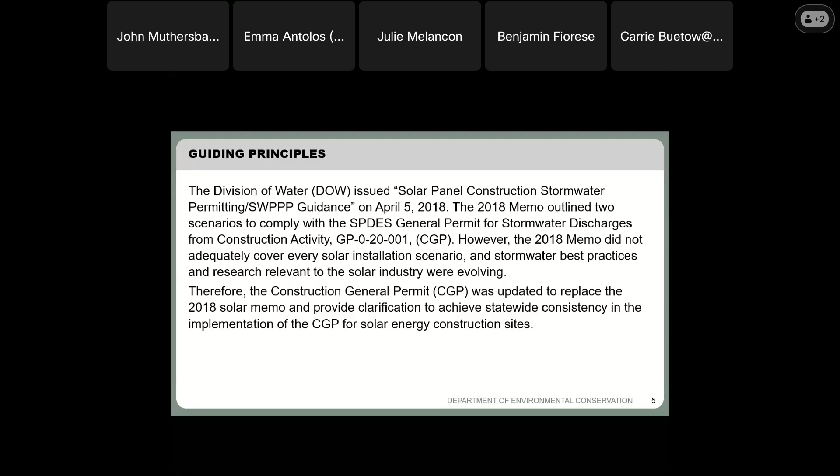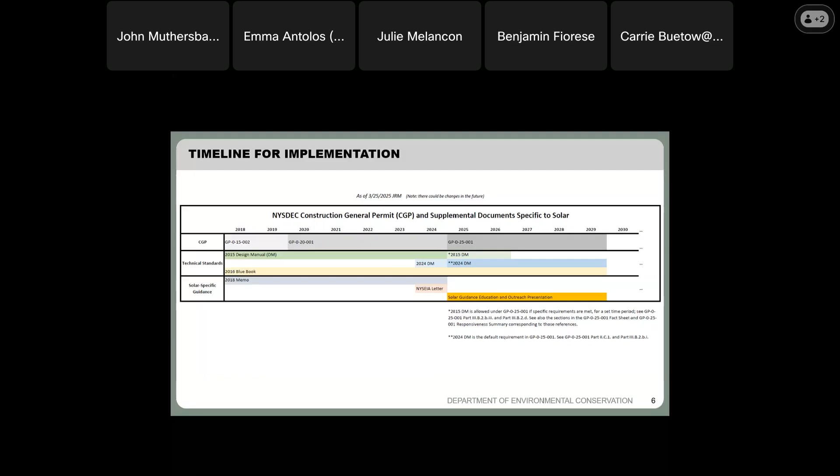This graphic talks a little bit about the design manual for our technical standards as well as our solar specific guidance. As you can see, the 2018 memo has officially gone away. There was a supplement called the NYSEIA letter, which was basically back and forth between New York Solar Energy Industries Association staff and DEC colleagues, and that has gone away as well. We're now relying on the solar guidance in the new construction general permit and this presentation. So if you have that 2018 memo, you can toss it out and refer to the permit going forward.

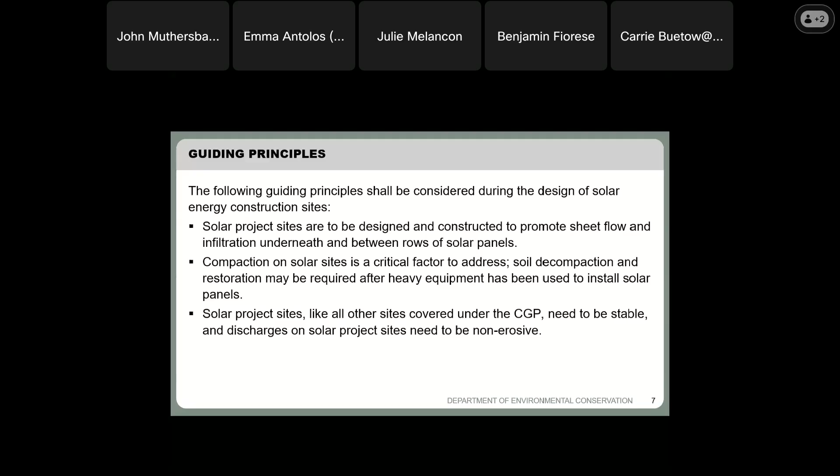We want to keep a couple of things in mind when designing solar facilities. We want them designed and constructed to promote sheet flow and infiltration underneath and in between the rows of solar panels. We want to address compaction on solar sites, and soil decompaction restoration may be required since there's a lot of heavy equipment moving across these sites, in between the rows and up and down the roadways. Solar project sites, like all other sites covered in the construction general permit, need to be stable, and discharges need to be non-erosive. That doesn't change for solar sites.

When we're looking at Appendix B tables 1 and 2, we're isolating solar array field areas versus other areas on site. The scenarios in this training only apply to the solar array field area of the project, meaning the rows of panels, the inner row spaces, and the surrounding buffer areas. It does not include traditional impervious areas like buildings, substation pads, and roadways.

If you have traditional impervious areas on site, the SWPPP has to address post-construction stormwater management controls for those areas of the project. If you're looking for relief from designing post-construction practices for these areas, there are some approved alternatives, such as limited use pervious access roads and alternative stormwater management practices for substations, and they can achieve sizing criteria and reduce post-construction practices. But in general, traditionally impervious areas need to have their post-construction stormwater managed.

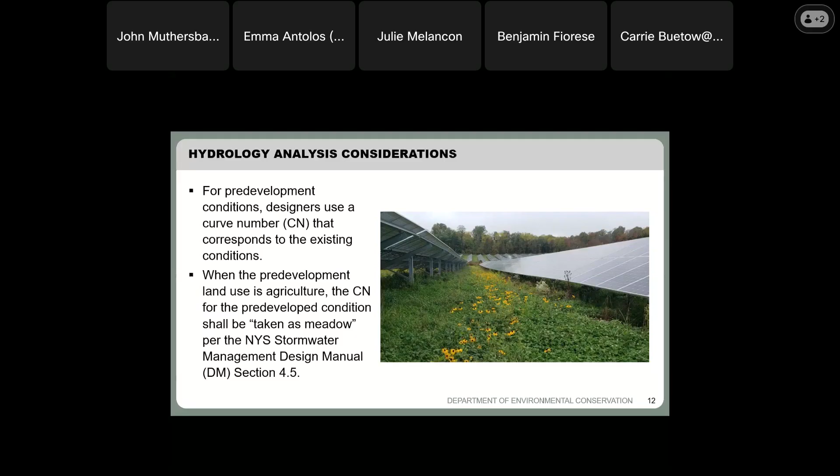For post-construction conditions, I'm going to talk a lot about Appendix B tables 1 and 2. The takeaway from Appendix B is that it's the section that tells you what type of controls you need for your project. Appendix B Table 1 covers projects that only need a SWPPP that addresses erosion and sediment controls. Table 2 includes projects that need post-construction stormwater management.

For projects that meet Appendix B Table 1 conditions, the solar panels are considered disconnected impervious area, and the curve number for meadow can be used for that solar array field area. In the case of agrivoltaics, pasture or row crops may be used to more accurately reflect the post-construction land use, and we're going to talk about that a little bit more later.

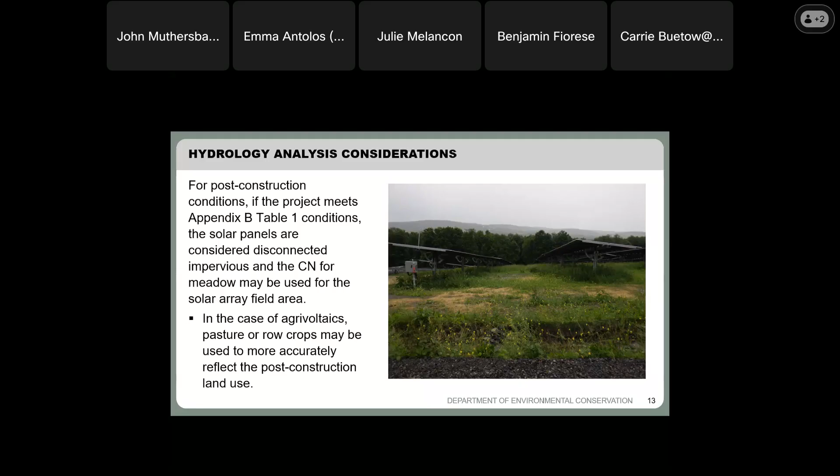If the project meets Appendix B Table 2 conditions, the solar panels are considered connected impervious area, and the SWPPP has to include post-construction stormwater practices for those areas. If you want, a downstream analysis can be conducted to determine if post-construction quantity controls for the 10 and 100-year events are needed, and that information is in the design manual, section 4.10.

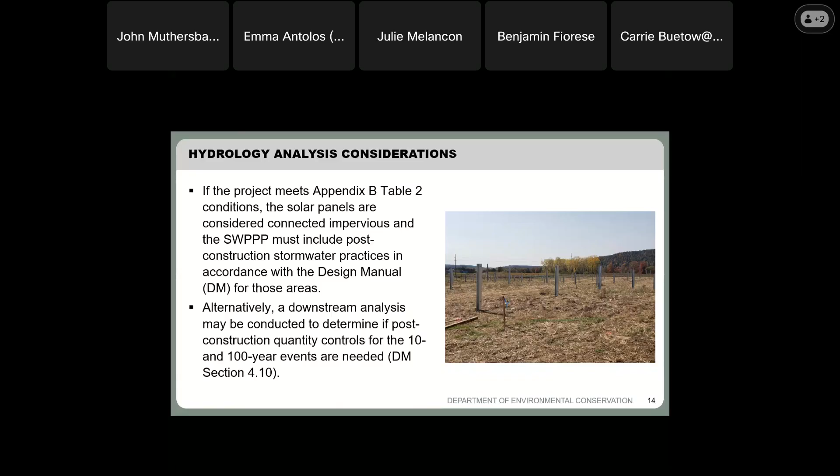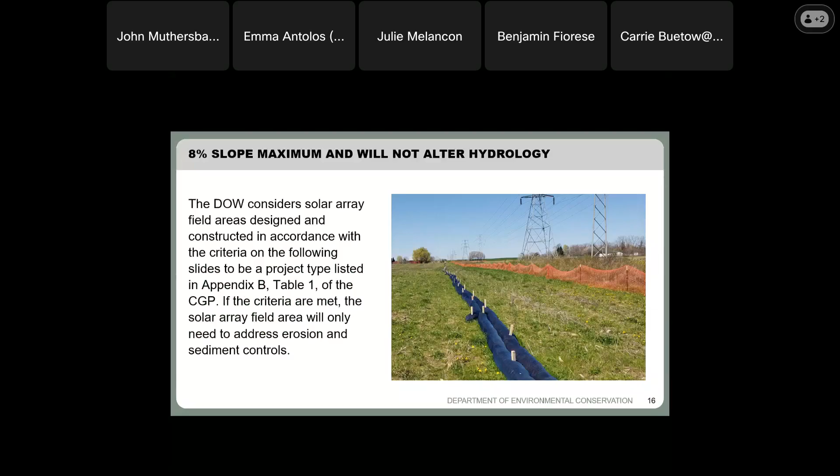So now we're going to focus on those projects that only need erosion and sediment controls. So 8% slope maximum and will not alter the hydrology. That's one of the criteria. So if the solar array field areas are designed and constructed in accordance with these criteria, then they only need to use erosion and sediment controls, like I stated. So the 8% slope maximum and is not going to alter the hydrology.

Panels have to be elevated off the ground. And when we talk about this, some people say, well, what does it mean to be elevated off the ground surface? And what the target is, is your well-established vegetative cover under the panels.

So if the panels aren't sufficiently elevated off the ground to allow a post-construction ground surface consisting of a well-established vegetative cover, and when we talk about that, we're talking about the final stabilization definition in Appendix A of the Construction General Permit, then it has to be considered connected impervious area for the hydrology analysis, and the SWPPP has to address post-construction stormwater management controls designed in accordance with the sizing criteria in Chapter 4 or Chapter 10 for the East of Hudson watershed.

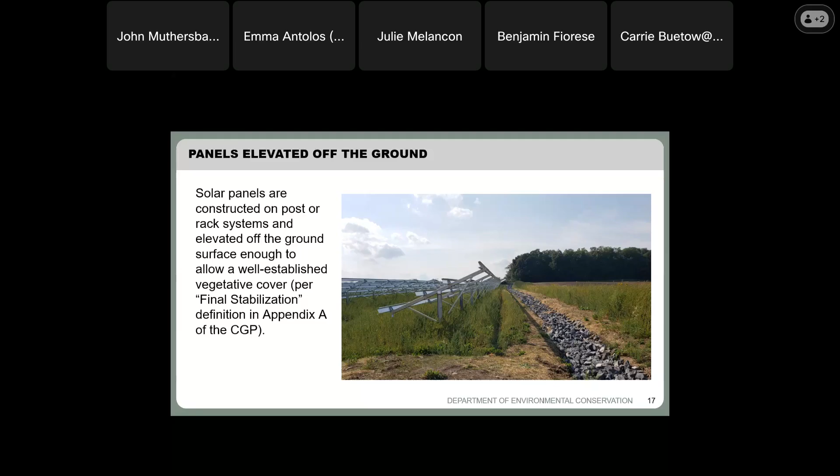So really, your height is dependent. If it's high enough, it depends on what vegetation is coming in below it. If you have agrivoltaics, you're probably going to need to have higher posts for your panels. And then if you're just having grass, just make sure it's elevated enough to get your grass growing.

Panels have to be spaced one table width apart. So that way stormwater can flow off the down gradient side of the panels and continue as sheet flow across the ground surface. And this is based in the design manual sections 5.3.2 and 5.3.4. We also have a diagram that we'll show in a little bit about the inter-row space requirements.

So panel spacing is really consistent with the concept of disconnection of impervious areas, and it's really an important component to consider when avoiding erosive conditions. So disconnection can be achieved through adequate spacing of the rows over areas of well-established vegetative cover. If your inter-row space requirements are insufficient, the infiltration is less likely, resulting in panels that are more likely to create concentrated flow paths and perform as impervious.

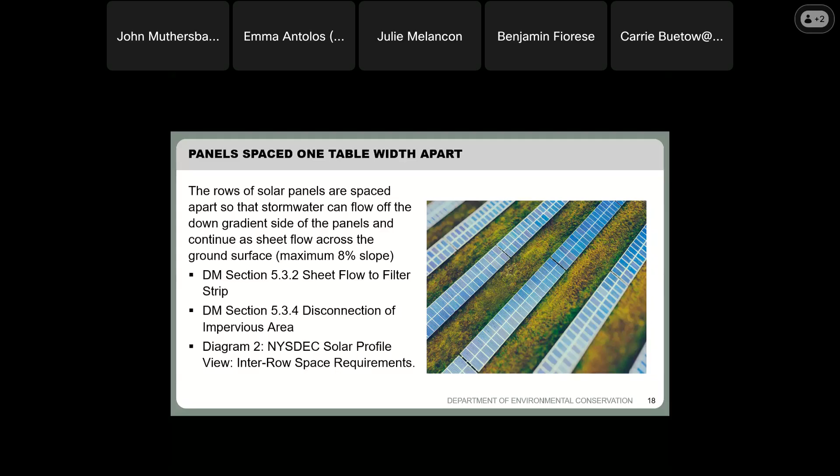So for solar array field areas that have insufficient spacing for infiltration, the disconnection credit for runoff reduction would not be applicable. And as a result, the SWPPP would need to address post-construction stormwater management control practices. So for the designer to meet the intent of disconnection, the design should consider the largest solar panel width, considering all rotations and positions, and provide that width as the minimum spacing down gradient of every row of solar panels in the solar array field area.

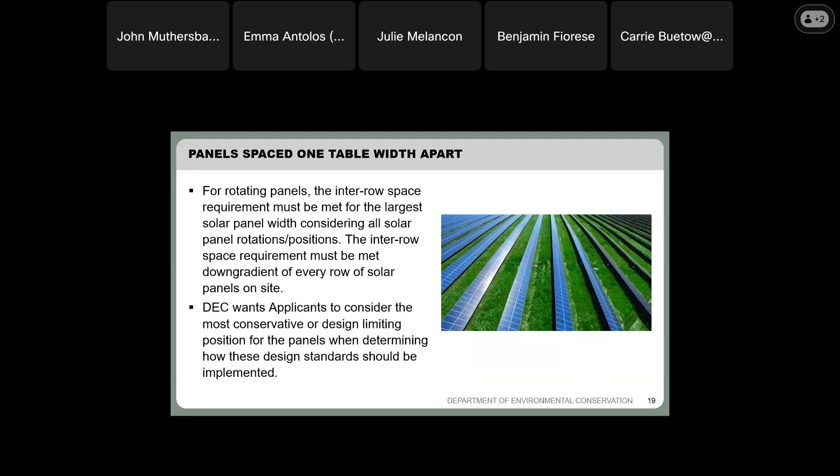And we want applicants to consider the most conservative or design limiting position for the panels when determining how your standards are going to be implemented. If you have rotating panels, I'm actually going to show you this next slide. So if you're using rotating panels, solar trackers aren't considered disconnected impervious area unless they meet the criteria.

The SWPPP has to demonstrate that the site conditions and placement of solar panels will allow for disconnection and achieve runoff reduction objectives of the Construction General Permit in order to apply the area reduction credit for the panels in all positions. So you can see the solar table width here; if this is a fixed panel, that's the maximum width. But if it was a rotating panel, if it went more parallel to the surface, it would have a wider width.

So we also want to make sure we're not altering the hydrology from pre to post development conditions. So what we refer to as the definition of altering the hydrology is from Appendix A of the Construction General Permit. And it basically says the post-development peak flow rates have increased by more than 5% of the pre-developed condition for the design storm of interest. So the designers really need to perform the assessment and the hydrology analysis to make this determination.

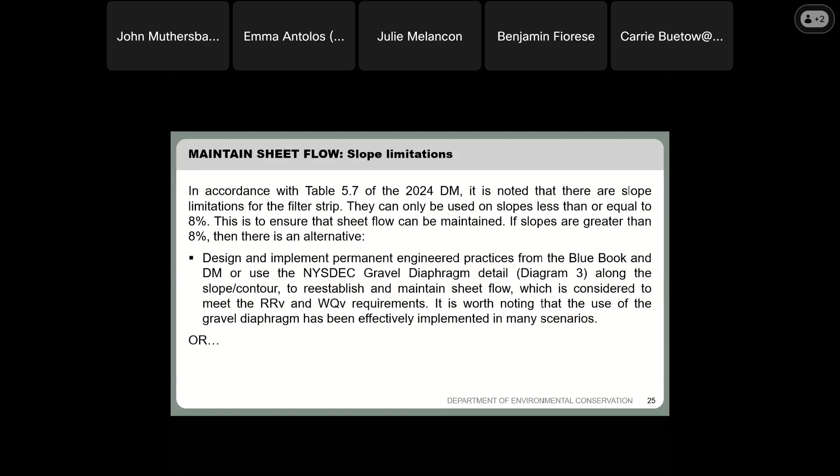So just keep in mind that the key is sheet flow. Or where sheet flow can't be maintained, consider the panels in that area to be connected impervious area and design post-construction stormwater management control practices to provide the water quality and quantity controls for that portion of the solar array field area.

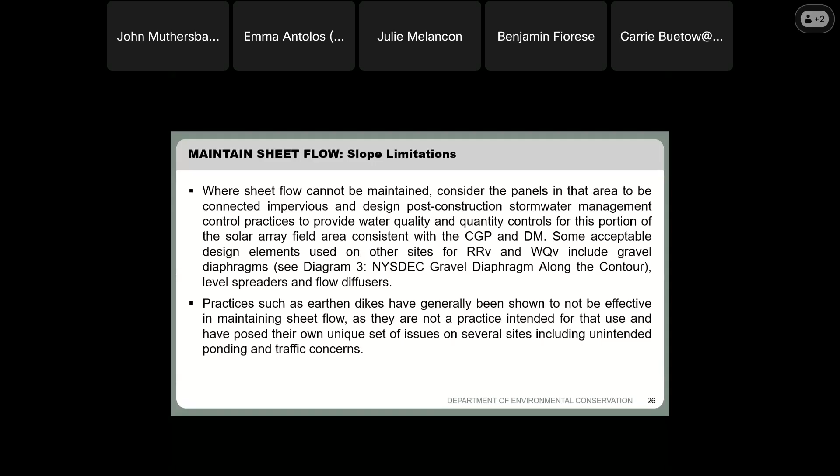Some other design elements used on other sites for runoff reduction volume and water quality volume include gravel diaphragms, level spreaders, and flow diffusers. We have had facilities come to us with designs for earthen dikes. We've seen some in practice, and they've generally been shown not to be effective in maintaining sheet flow, as they're not really a practice intended for that use, and they have their own set of issues, including unintended ponding and traffic concerns when construction vehicles are going back and forth. They can weaken those earthen dikes and cause places for concentrated flow to overtop them.

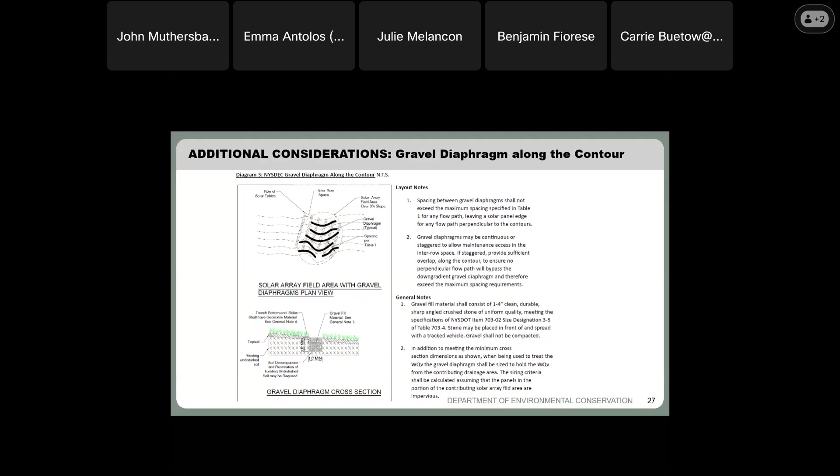So here is our gravel diaphragm diagram. And there are some notes that go along with it. Basically, they want to be placed on the contour to reestablish that sheet flow. They have a specific spacing used to make sure that there's not too much of a run between diaphragms, so that there's not real erosion starting up in between the two.

One of the things that we've noticed is if these aren't protected during construction, they can get plugged up with silt before things even get started. So to prevent excess silt and debris during construction, it's recommended to leave the excess fabric to fold over the diaphragm from the up-gradient side. And then you can remove that once everything is stabilized.

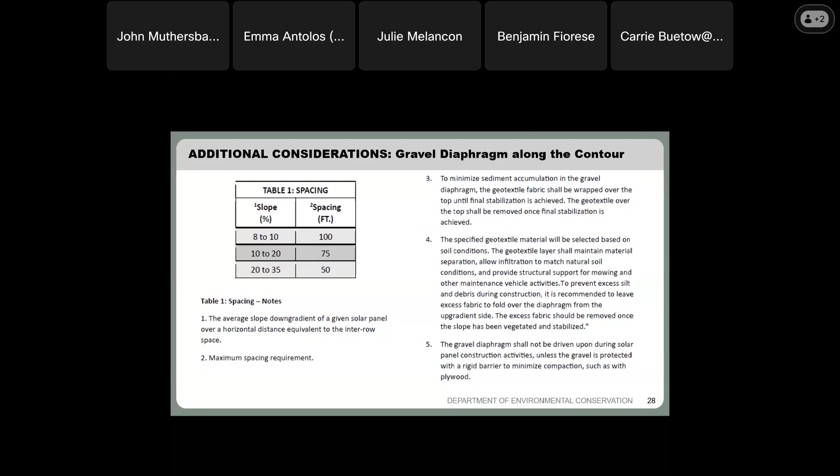So what are the takeaways here? We want to make sure that you design these so that they're stable. When the project can achieve panels elevated off the ground surface, rows of panels have adequate spacing, sheet flow is maintained, and there's no change in hydrology, no other practices are required to address the water quality volume and runoff reduction requirements for the solar array field area. You can just do erosion and sediment controls and quantity controls if needed.

So Appendix B, Table 2: when do you need a full SWPPP? Well, if you have slopes greater than 8% and you can't maintain sheet flow, if you have slopes less than 8% but you're going to alter the hydrology, or if you have panels spaced closer than one table width apart, or you have ground-mounted tables that don't allow for the establishment of the 80% vegetative cover, and all traditional impervious areas included with the solar development.

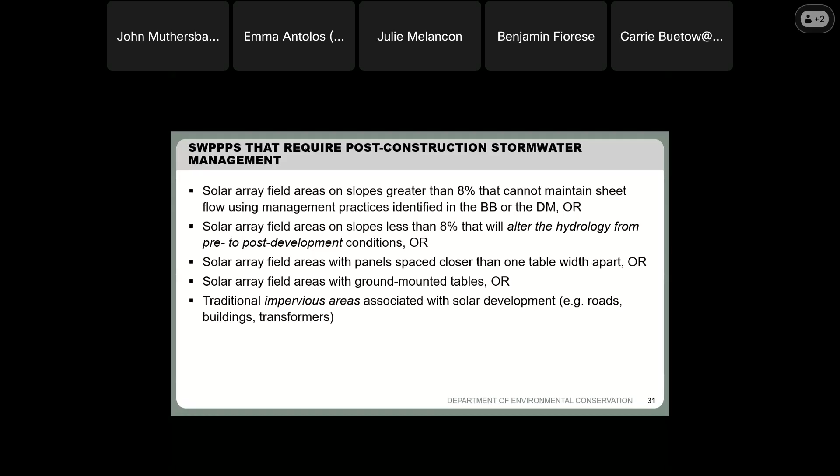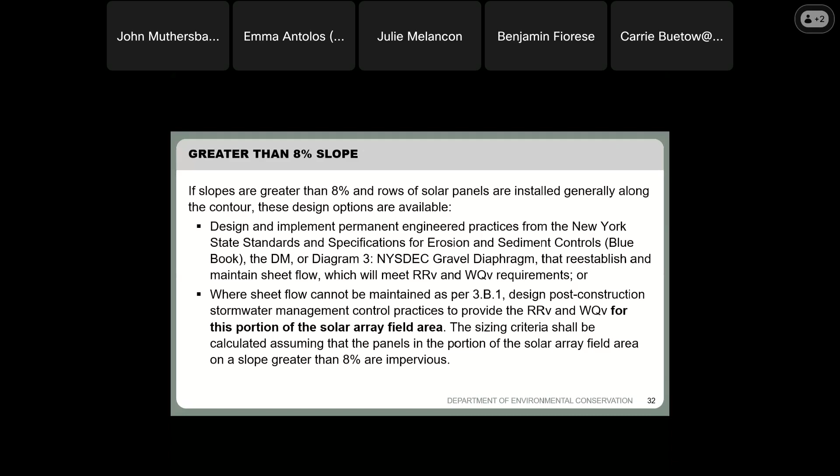So if your slopes are greater than 8%, you're generally along the contour. You can, like we said before, design and implement permanent practices from the Blue Book, the design manual, or use the gravel diaphragm that are going to maintain sheet flow and meet the runoff reduction volume and water quality volume requirements. Or if you can't maintain sheet flow, then you need to design post-construction practices that provide the runoff reduction volume and water quality volume for that portion of the solar array field area. And the modeling is with those areas as connected impervious.

If you have slope greater than 8%, again, reiterating that you can reestablish and maintain sheet flow, or if you can't, you're going to design post-construction stormwater management control practices to provide water quality and quantity treatment for that portion of the solar array field area, assuming the panels are connected impervious. Just a note here, if you use the gravel diaphragm along the contour to meet the water quality volume and runoff reduction volume requirements, the requirements for channel protection volume, Qp and Qf, must be met with a different practice.

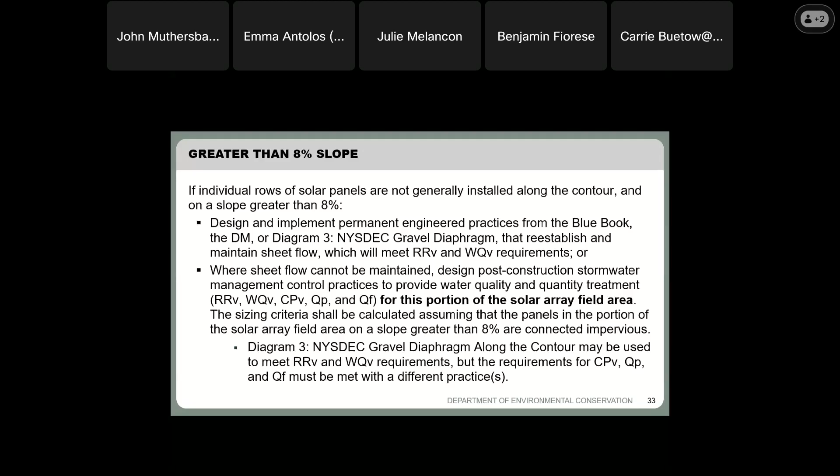So unlike conventional construction projects, where you have your elevated panels, your rows are spaced well and sheet flow is maintained, the area under the panels will function as vegetated open space. No other practices would be required to address water quality volume and runoff reduction volume requirements for that solar array field area. So you can have a full SWPPP that does not require water quality volume and runoff reduction volume for solar array field areas that meet that criteria. Quantity controls from chapter 4 of the design manual must also be addressed unless one of the waiver criteria from chapter 4 can be applied.

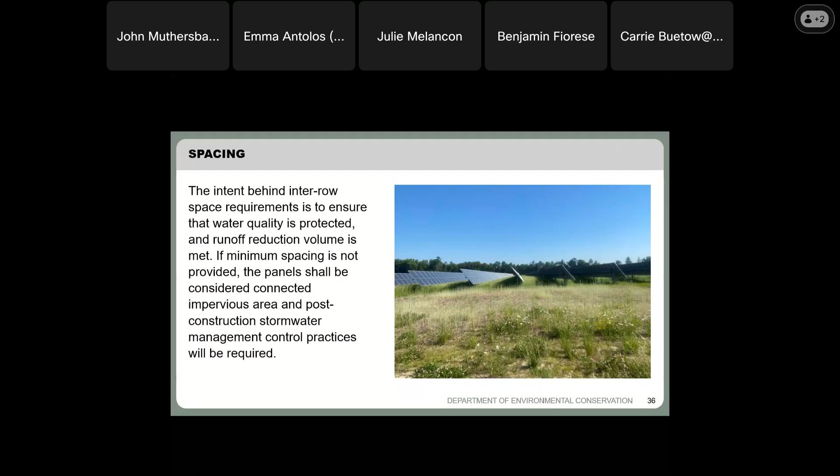So spacing: the intent behind the inter-row space is to ensure that water quality is protected and runoff reduction volume is met. If you don't have that minimum spacing, the panels do have to be considered connected impervious area, and post-construction stormwater management control practices are going to be required. So as a summary, here's where you need a basic SWPPP, here's where you need a full SWPPP. Just keep these in mind. This is a great summary to keep in your back pocket.

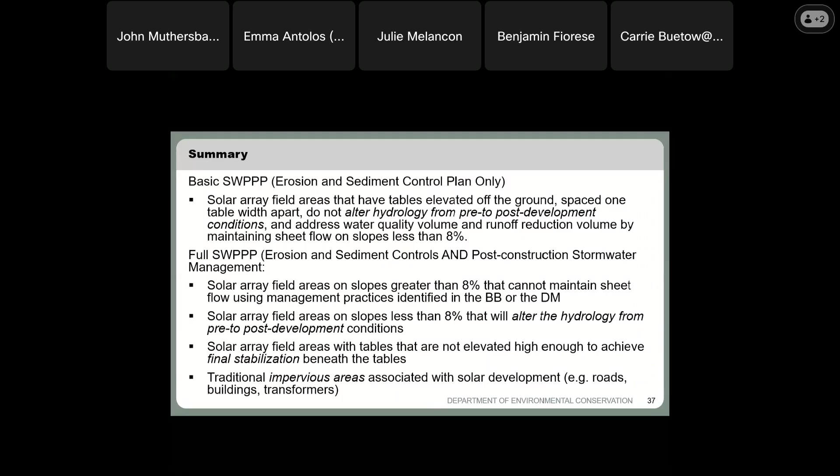Now, we've talked a little bit about some optional tools for solar sites. We want to get into that a little more. I did notice there was a question in the chat about limited use pervious access roads. I didn't see exactly what the question said, but maybe this would answer some of the questions. It's very important that you recognize that limited use pervious access roads are not required for solar sites. There's no mandate that says you have to use this. And in fact, the limited use pervious access road is not really suitable for all sites. It can only be used if the following criteria have been met.

So they can't be utilized during construction. They can't be temporarily covered with fabric and stone or any other materials during construction. They can't be used as a runoff reduction volume practice for the other impervious areas on the site. For the hydrology analysis, the road has to match pre-development conditions. And the design and construction needs to comply with all of the notes in the details. Okay. Let me just go through these notes. So here's some other examples of limitations.

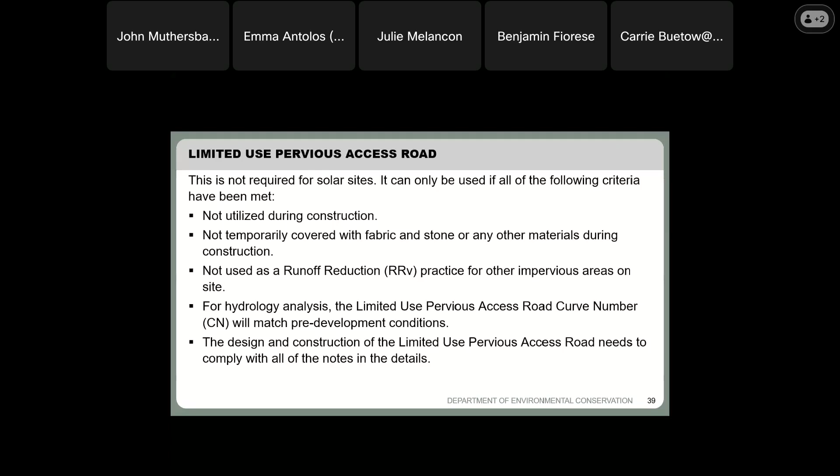There are slope limitations. Cross slopes can't exceed 6%, and the longitudinal slope shouldn't exceed 15%. And if you use them during construction, it may impact soil or other conditions that require testing and reconstruction to be effective as a pervious feature. And many sites don't have enough available area to construct both temporary and permanent roads in separate footprints. And it can't be constructed or used until all areas subject to runoff onto the road have achieved final stabilization. And one more thing to note is these are not permeable pavers or permeable asphalt, and they shouldn't be treated or modeled that way.

We also have an alternative substation design that was developed by EDR. Those systems provide treatment and management of the water quality volume, runoff reduction volume, and channel protection volume, Qp and Qf, by providing storage and infiltration of all rain events up to and including the 100-year storm. It has to comply with chapters 5 and 6 of the design manual not to be considered a deviation. So what that means is you still have to consider things like separation to bedrock and groundwater, and the minimum width of a riparian buffer or filter strip is 50 feet.

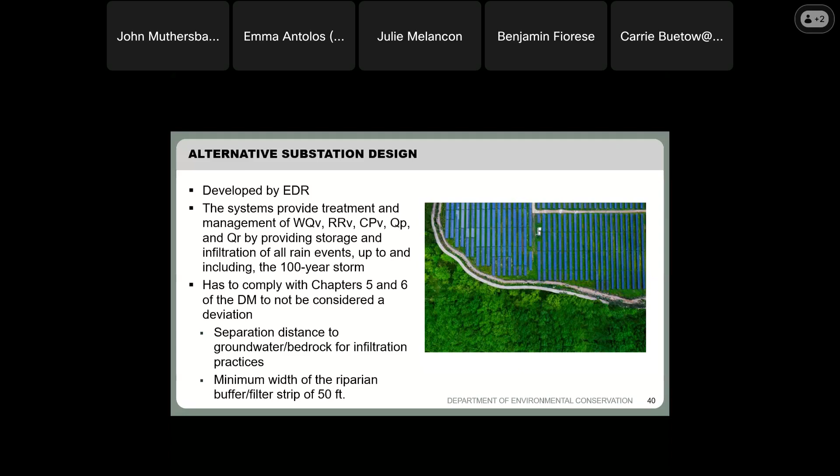And one thing of note, I just wanted to say before I forget, that DEC is working on a catalog of alternative practices that we're going to be putting together and making available on our website.

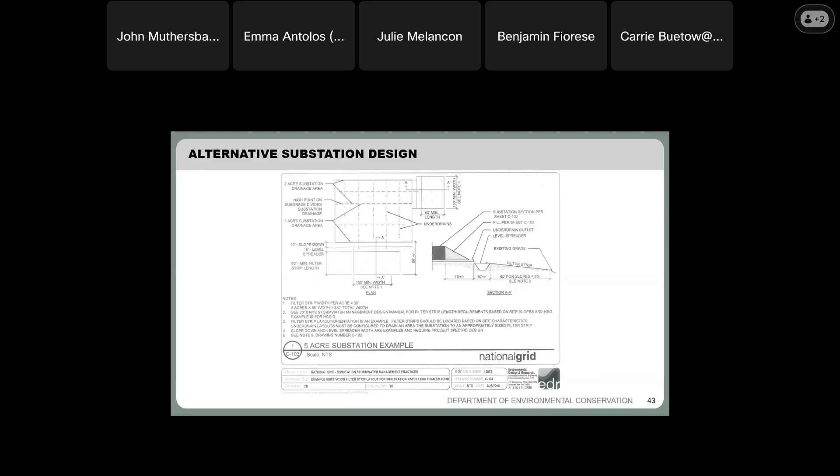And there's flexibility in modeling these in TR-55. If they're mostly vegetated, they can be considered a pervious surface. If they're more like a farm road, they can be modeled as a dirt road. You just use your best professional judgment when you're doing your calculations.

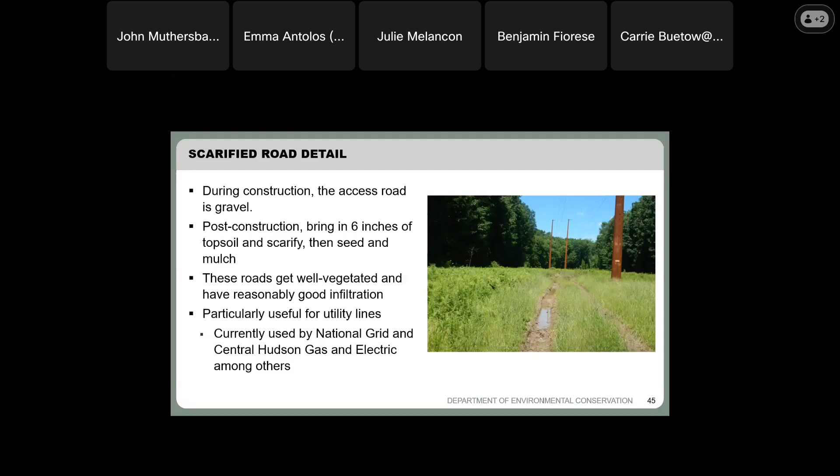So during construction, the access road consists of gravel. Post-construction, they bring in 6 inches of topsoil and scarify and seed and mulch. And these roads get really well vegetated. They have reasonably good infiltration. Like I said before, they're really useful for utility lines. National Grid and CHGE are using them currently. And then we have the detail that we're going to add to the catalog of practices.

So the flow diffusers provide additional attenuation to reduce runoff rates. You can stagger them beneath the panels to catch the water leaving the panels and slow it down while avoiding most of the drive aisles for construction. When they're used to treat the water quality volume for the panels, the designer sizes the storage volume of the flow diffuser sump to hold the calculated incremental water quality volume of the contributing panel sub area flowing into each diffuser.

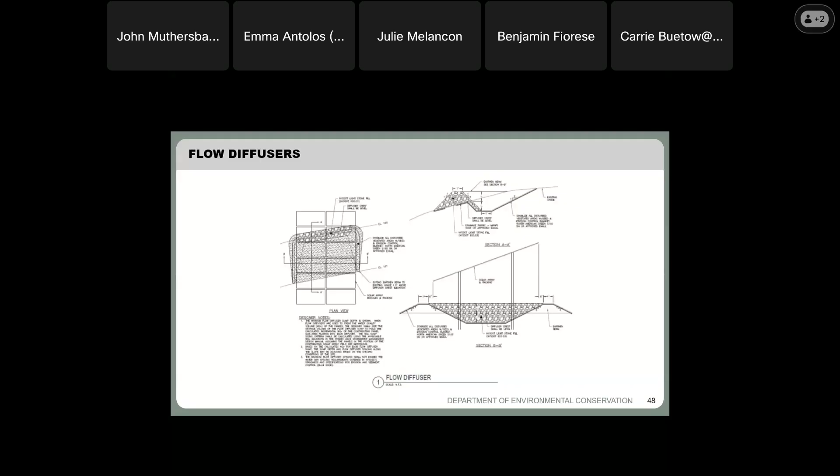When you're looking at the sump, you can calculate that using the applicable water quality volume equations in the design manual. You just have to assume the panels in the portion of the contributing solar array field area are connected impervious for the purposes of sizing the sump. And then maximum flow diffuser spacing is the same as water bar spacing in the Blue Book. And here's the detail for that flow diffuser.

So when sizing these practices for the water quality volume, calculate the percent impervious by looking at the solar table width over the solar table width plus the inter-row space width.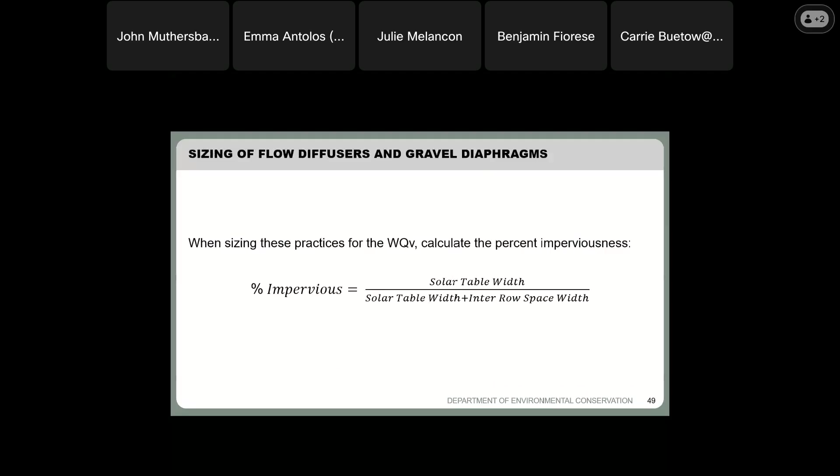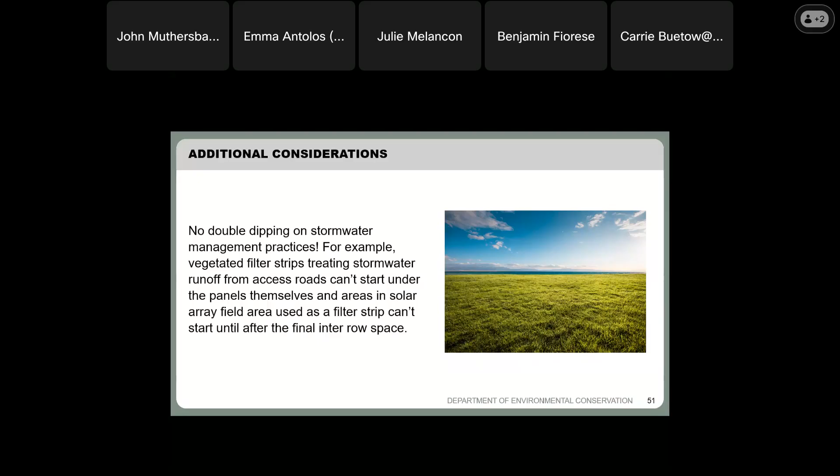Now we wanted to put in some additional considerations for these sites. A lot of these sites have other activities going on, especially if you're considering large scale renewables. So we want to make sure there's no double dipping on stormwater management practices. So for example, your vegetated filter strips treating stormwater runoff from access roads can't start under the panels themselves. And areas in the solar array field area used as a filter strip can't start until after the final inter-row space.

There are additional DEC resources that you can look to. For example, you can consult the Division of Water's Bureau of Flood Protection and Dam Safety's floodplain management guidelines for solar array and wind farm projects, if you're considering a solar project in a floodplain. Division of Materials Management also has their DMM-4, which is the photovoltaic solar projects at closed landfills program policy, if you're considering a landfill project.

Decompaction. So a lot of sites struggle with decompaction, when it can take place and the order of operations to make sure that you're not disturbing any electrical lines that have already been laid or things like that. So heavy use areas such as laydown yards and temporary access roads need to be decompacted to 12 inches, or 18 inches in agricultural areas.

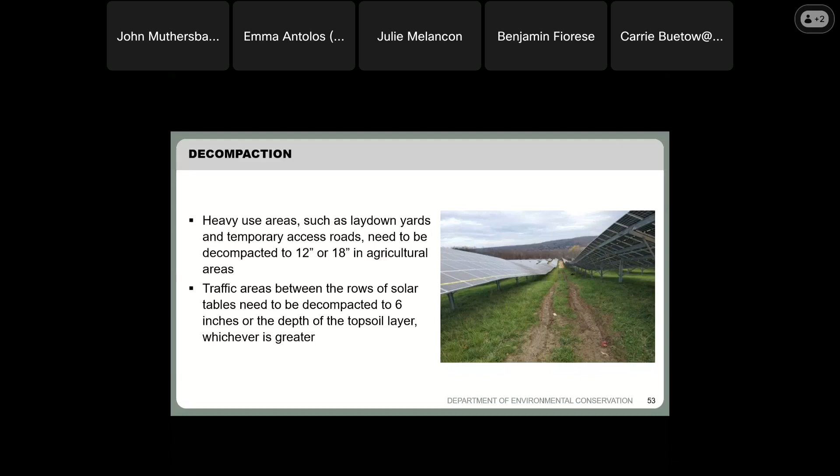Traffic areas between the rows of solar tables need to be decompacted to 6 inches or the depth of the topsoil layer, whichever is greater. At the end of the project, if you can't push a 3/8 inch metal bar 12 inches into the soil with just your body weight, you haven't done enough.

If your solar array field area falls under table 2, which means you need a full SWPPP and no decompaction is performed, then the designer needs to go up one hydrologic soil group for modeling and provide water quality volume treatment for those areas. So for example, if you are in A soils, it would be B soils. If you were in B soils, it would be C soils, and so on.

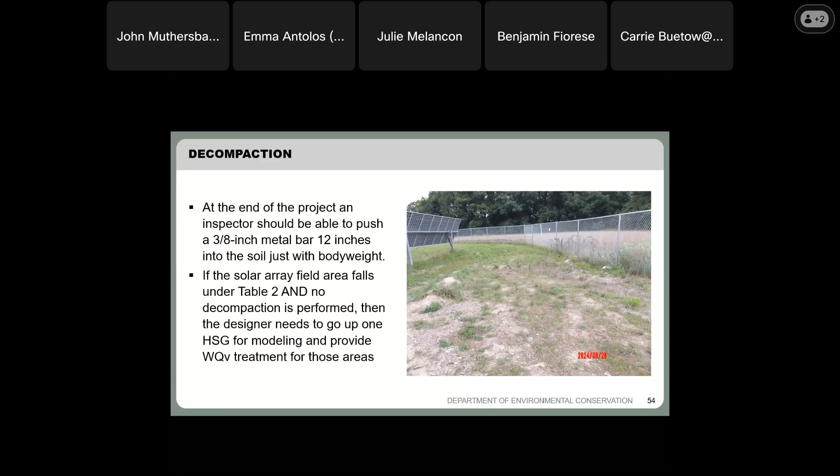We get a lot of questions about dewatering. The construction general permit only allows for discharges of clean water. If soil or groundwater contamination exists, or a polymer or other water treatment chemical is used, then you have to hold and haul or apply for an individual SPDES permit. And if you're going to apply for an individual SPDES permit, that's really going to have impacts on your project timeline. It takes about a year to get an individual SPDES permit.

So if you are working in areas of contaminated soil or groundwater, and you know you're going to do a large volume of dewatering, you really need to consider your options - if you're going to have frac tank upon frac tank of water hauled away, or if you're going to treat it on site.

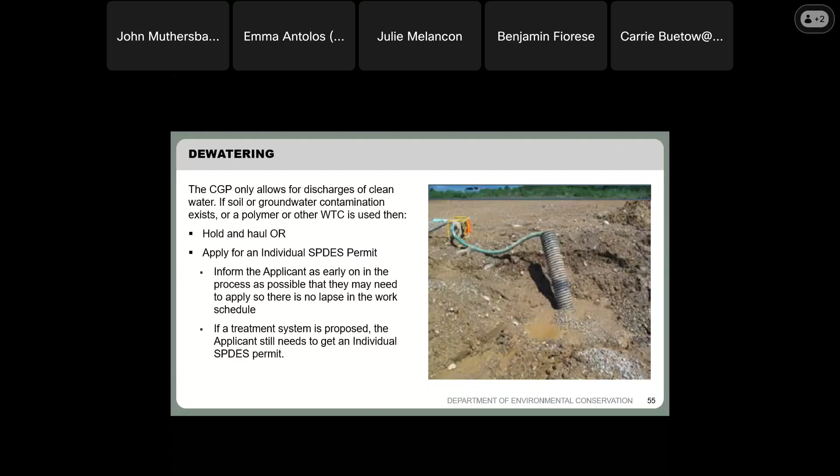Oh, and this is important too. If a treatment system is proposed - say you have like a package plant or something you're going to put on site to separate out the fines from the water - your discharge still needs to get an individual SPDES permit, because we need to make sure that the discharges don't have any residual chemicals left.

So what is contaminated? We could have a whole day discussion on just what is contaminated, but these are some of the guidelines. Region 2, which is New York City, is unique in that it's assumed that all soil and groundwater are contaminated based on historical knowledge and information. So when a dewatering application comes in, ask the applicant, or the applicant should submit the calculated radius of influence, and look up any sites with historical contamination within the radius of influence.

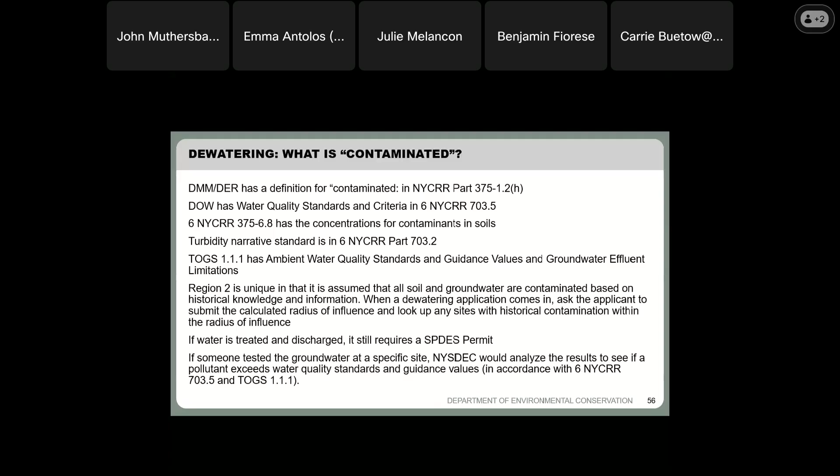Another thing to consider with dewatering is whether you're going to need a water withdrawal permit. These are just the criteria here. So if you are on Long Island, you might need a Long Island well permit. You might need a water withdrawal permit if you're going to be doing more than 69.4 gallons per minute, or 3 million gallons in any 30-day period, in all other New York counties.

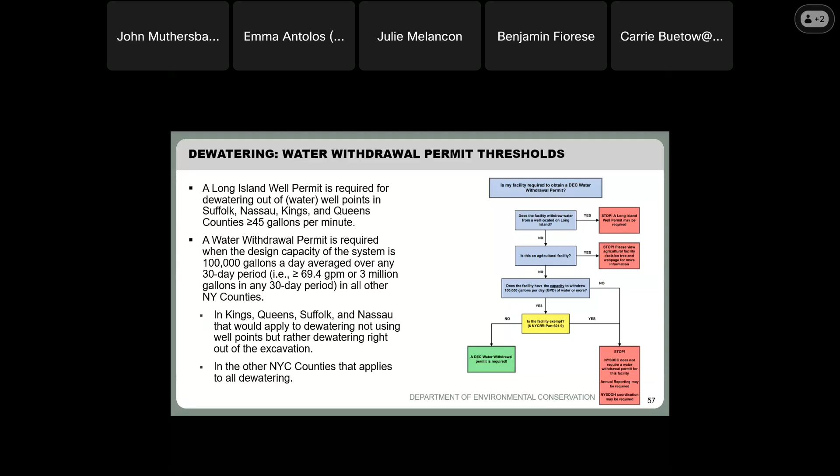Dust control, use of polymers. DOT has an approved list of polymers for dust control on their website, and there are only 5 products on it. These are the 5 products, so we'll share those with you.

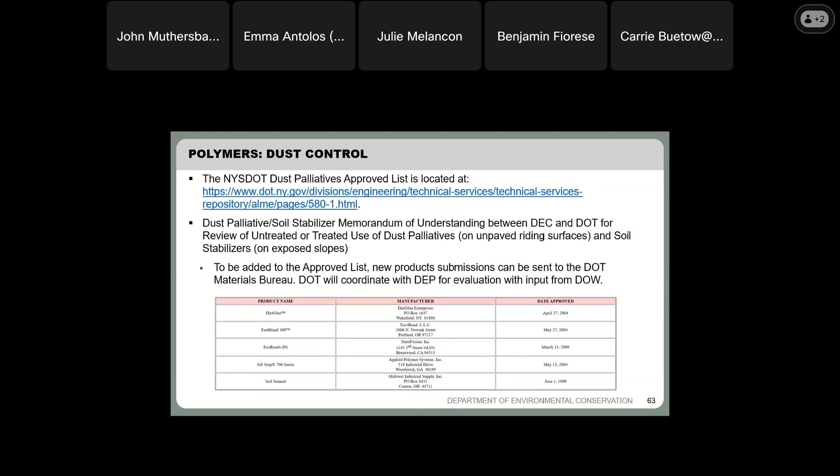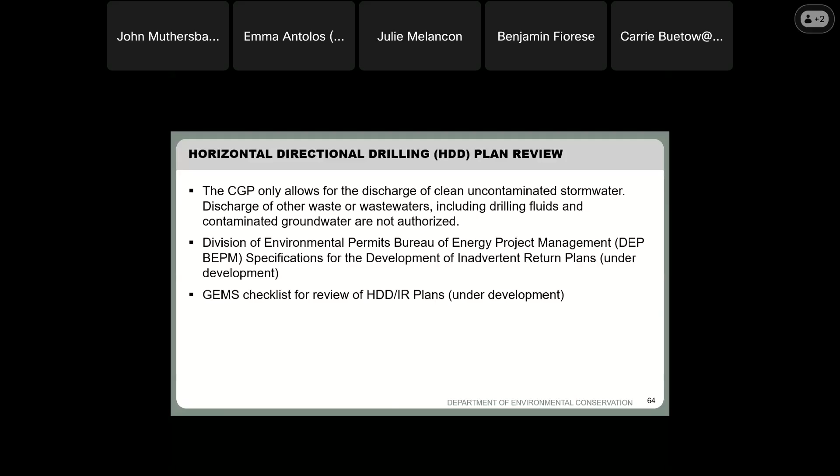The Division of Environmental Permits, their central office's Bureau of Energy Project Management, is developing specifications for the development of an inadvertent return plan. And my section, GEMS, is working on a checklist for a review of HDD and IR plans to make sure that they meet the minimum requirements.

And then you really need to have a sound frac out plan, including keeping frac tanks and vac trucks on site during drilling activities in case there is an issue.

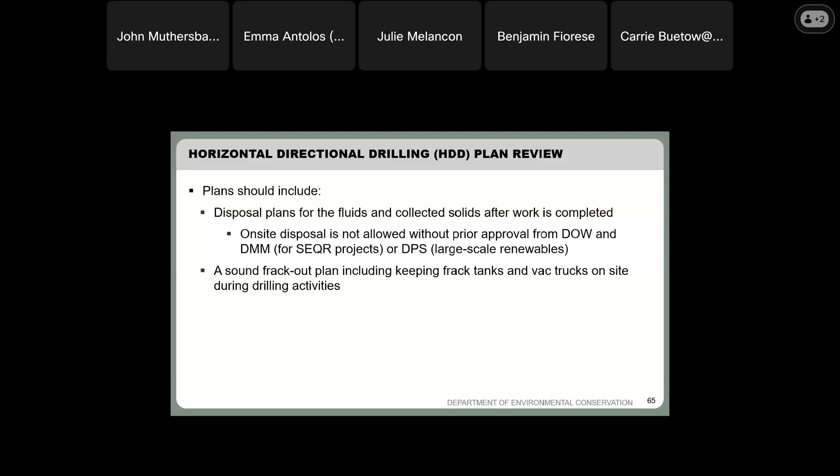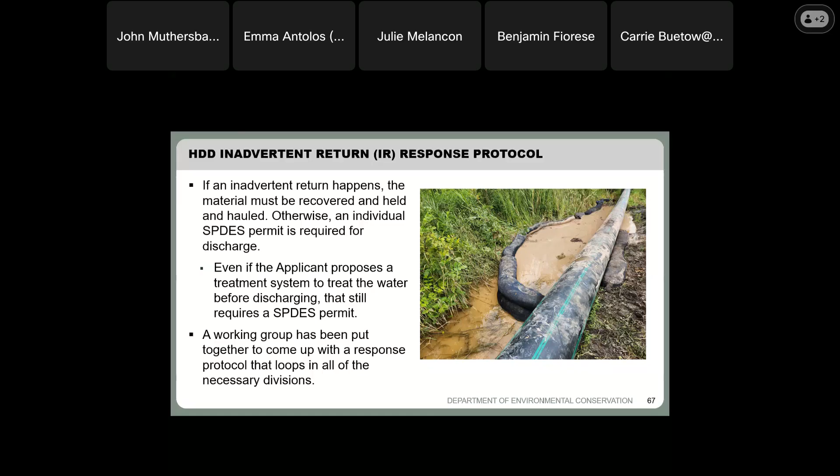If an inadvertent return happens, the material has to be recovered, held, and hauled, or you need an individual SPDES permit for discharge. If you're proposing a treatment system to treat the water before discharging, that still requires a SPDES permit because we need to make sure all the residual chemicals are not discharged. A working group has been put together to come up with a response protocol that loops in all the necessary divisions here at DEC when an inadvertent return happens. When an inadvertent return is identified, on-site environmental monitors are required to report it to a single point of contact, which is the Division of Environmental Permits, Bureau of Energy Project Management, in Central Office. I'm not going to get too far into the weeds on this, though.

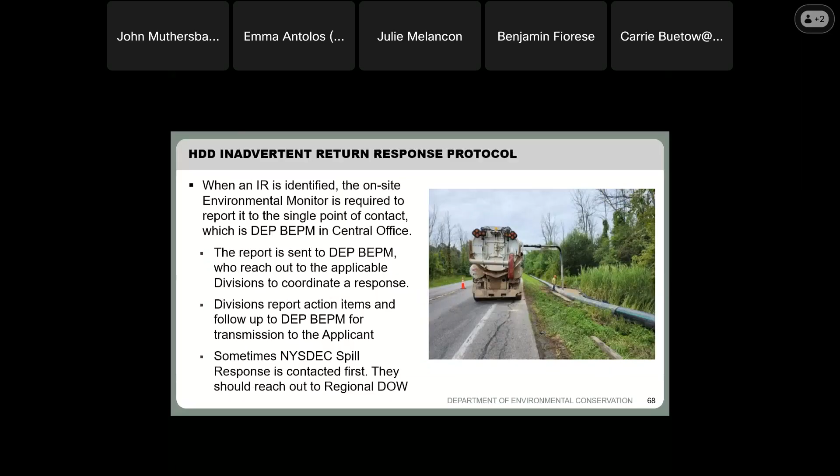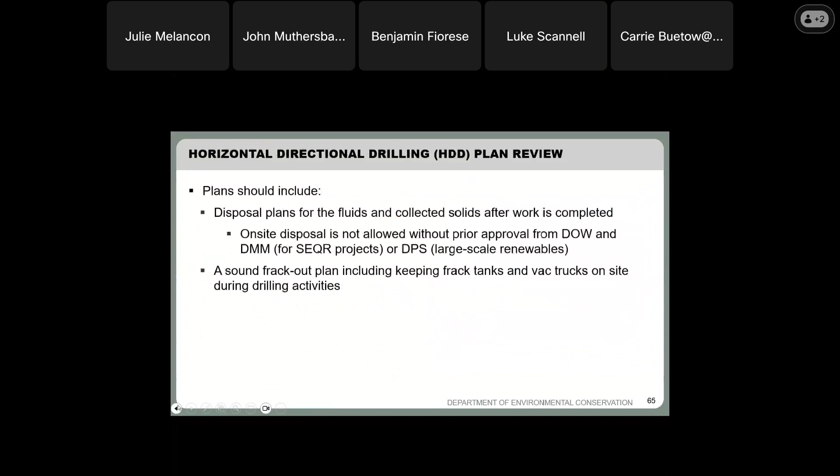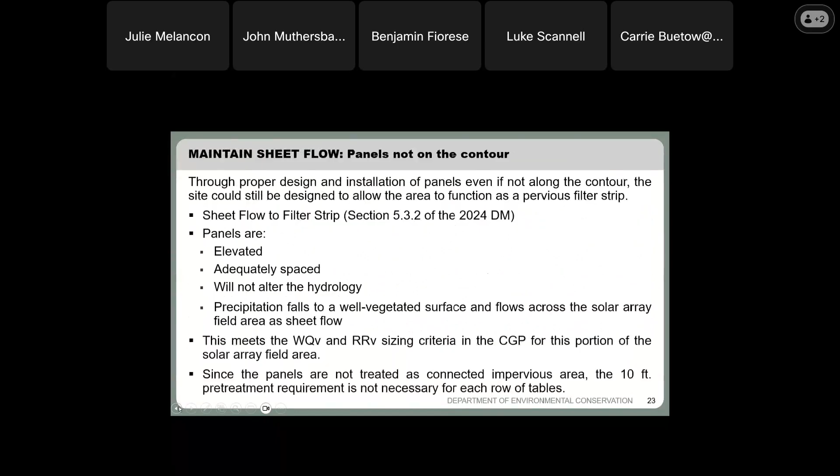I don't know what I did here. Geez Louise. I'm going to stop sharing for a second and then start sharing again because I don't know what I did. I don't think you can see what I'm seeing right now. Can you see me going back through the slides now? Yes, okay good, thanks Julie. Sorry, my screen is giving me fits. I'm doing this. There we go.

Julie, if I could chime in, I think you explained this already in the presentation, but this question and the required interrow space is one of the criteria to be considered a Table 1 category. It's not that we're saying solar development can never vary from this. We're just saying if you want to be considered Table 1, this is one of the criteria you need to meet. Otherwise, if panels are placed closer than that, it would be one of the factors that bumps it to Table 2 as far as the CGP requirements. Thank you, John.

Next question. Do these practices applied to project design and construction greatly impact decommissioning costs that may not have been understood in decommissioning plans negotiated during the previous guidelines? I don't know the answer to that question. Would anybody else on the panel know the answer?

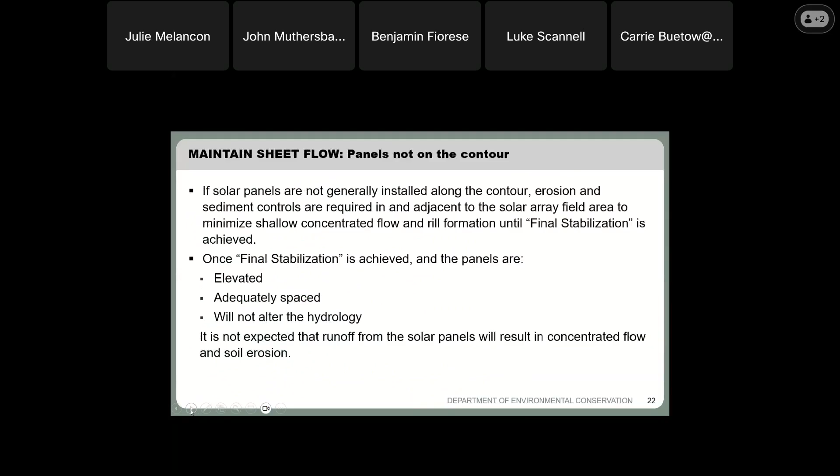Substation option stores water in the substation stone, right? Yes, there are two substation options. One is infiltration, where water gets temporarily stored in the stone and infiltrates into the soil. The other is where it's temporarily detained in the stone and then discharged through perforated under drains to a level spreader and filter strip. In both cases, it's temporarily stored within the stone below the substation, which is the reservoir course on the slide Julie is showing.

I'm not sure what this is referring to, but somebody said, how was your talk on Friday? Did you get any answers on LTIP that we didn't? I'm not sure what that refers to. Yeah, I'm not either. I'm not sure if whoever put that question in the chat would like to clarify.

For now I'll just move on to the next one, which is, when will this catalog of practices be ready? I'm not sure if Cam is on, but we were aiming for fall of 2025.

How do we get a copy of the solar development slides? I plan to send another announcement using our CGP announcements mailing list once we have this recording and the slide deck available on our CGP webpage, which is the Stormwater Permit for Construction Activity DEC webpage. So again, if you'd like to be on that mailing list and you're not already, please reach out to me or to our Stormwater Info email account. I'm happy to add you to that mailing list so you get updates like that.

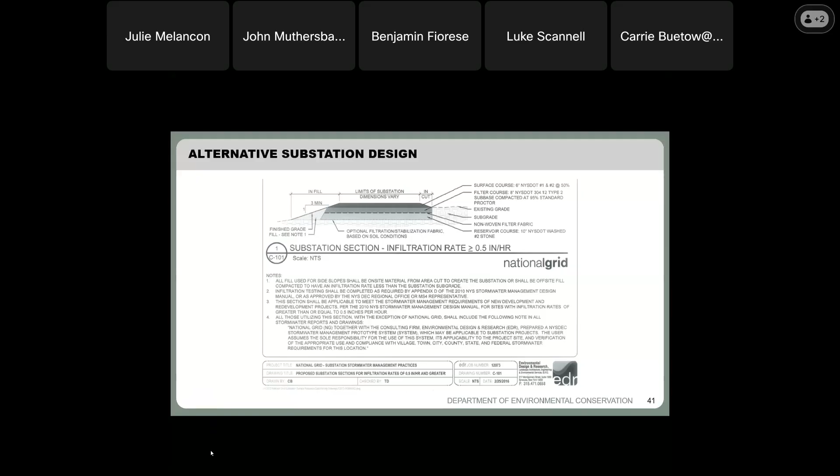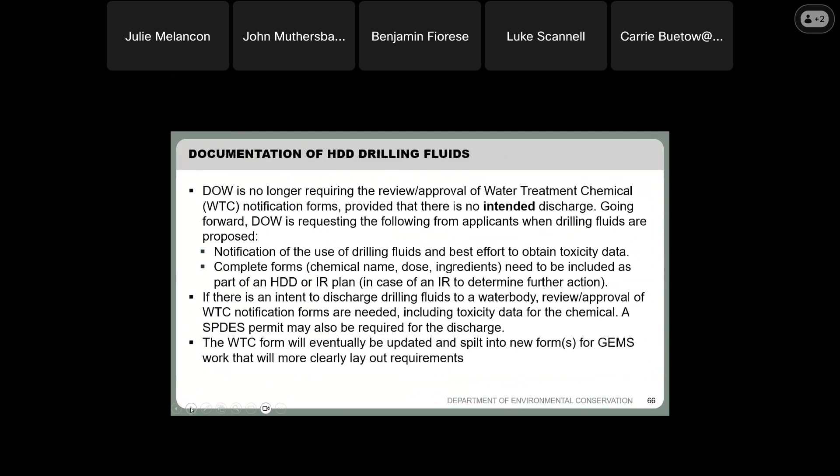The substation isn't in the design manual, and that is intended to treat an impervious area, so I imagine that would. And if you were using the gravel diaphragms as a treatment practice, I imagine that also would. So if they're being used to provide water quality volume treatment, then they are something that's not in the design manual. That would trigger that 60-day review. That's my understanding. Do you guys agree with that? Yes. Yes.

Okay. Next question is, do you have specific guidance on what seed mixes should be used for meadow vegetation? No, there are some seed mixes recommended in the Blue Book for stabilization purposes, but most solar sites are going with other mixtures. A lot of them are doing pollinator-friendly mixes, and really that's up to the project landscape architect to identify whether the seed mix will provide the appropriate surface stabilization within the required time period

based on the project's timeline. When are they stabilizing the site versus when are they trying to close out permit coverage or get into weather conditions where we expect that we need a stabilized surface. So that's something the registered landscape architect should be making a decision on.

All right. Next question is, how are we meant to handle time of concentration within the context of solar arrays that do not alter the site hydrology between pre and post development conditions? Decreasing the sheet flow distance to 100 feet for a sub area with no impervious cover proposed seems to be a case of fixing a problem that didn't exist in the first place.

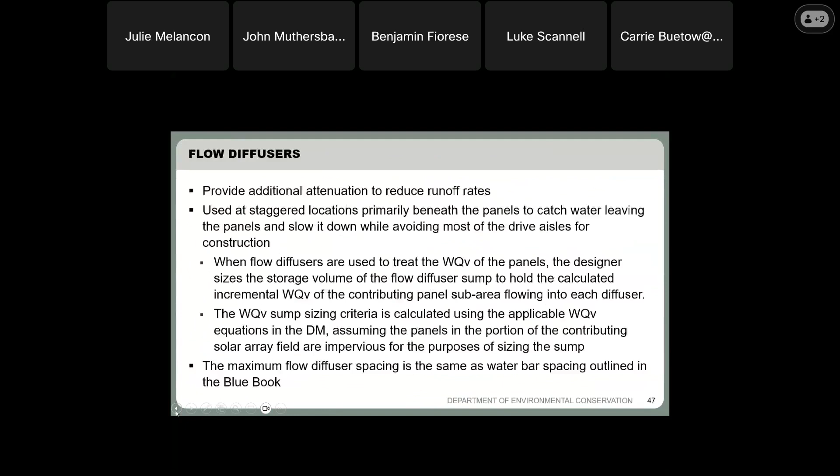Okay, so there's a couple of things here. Let me see if I can go back a ways here, so just bear with me. If you look at the figure that we have for our solar panel modules, we have taken into account gaps between the panels. Here's the solar table, and the solar table is made up of individual solar modules or solar panels. So if I'm envisioning what a stacked panel is like, it would be two or more solar tables together.

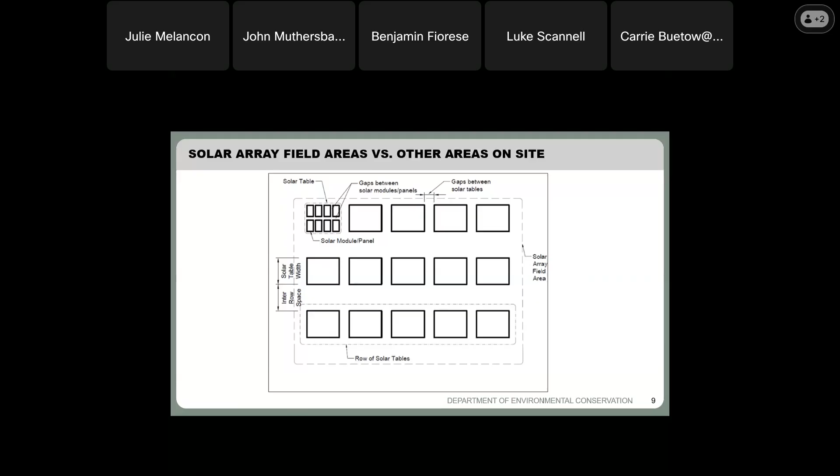But you're still going to have the gaps between the solar modules and panels. So when you're looking at this diagram here, you would still look at the whole table width. Does that make sense? So if they're stacked, you would still look at the overall surface area to determine your inter-row space.

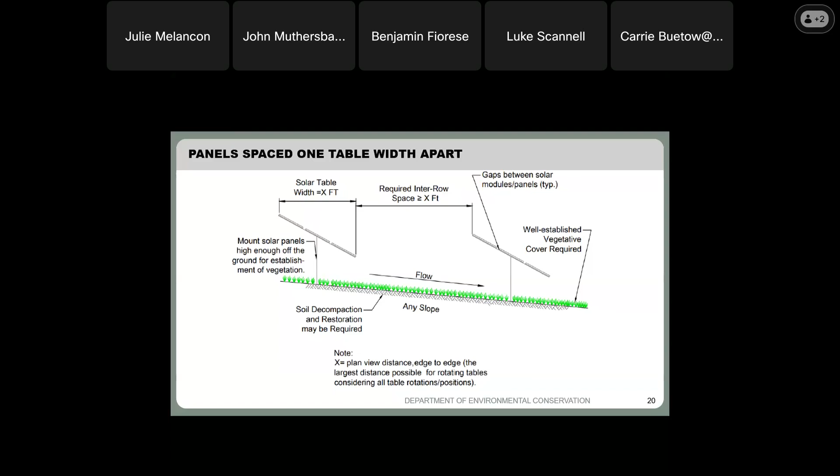When you imagine a barn roof where all the water comes off on one drip edge, you can have the vegetation die right below the panel. So this can be beneficial in preventing impacts to vegetation growth from water running off the panels. However, once the vegetation is well established, this doesn't really change the concentration of flow. It comes off the panel, goes through the vegetation, and is assumed to be sheet flow at that point, and as it concentrates, it forms that shallow concentrated flow.

When the panels are perpendicular to the slope, we can create erosion pathways along each of these drip edges, and that's typically where, when we're on a slope that's a little steep and we have our gravel diaphragms or other devices to help break up those concentrated flows, we'll see those at each point. But in practice, this is helpful during construction to reduce the impacts on the vegetation being established below the panels.